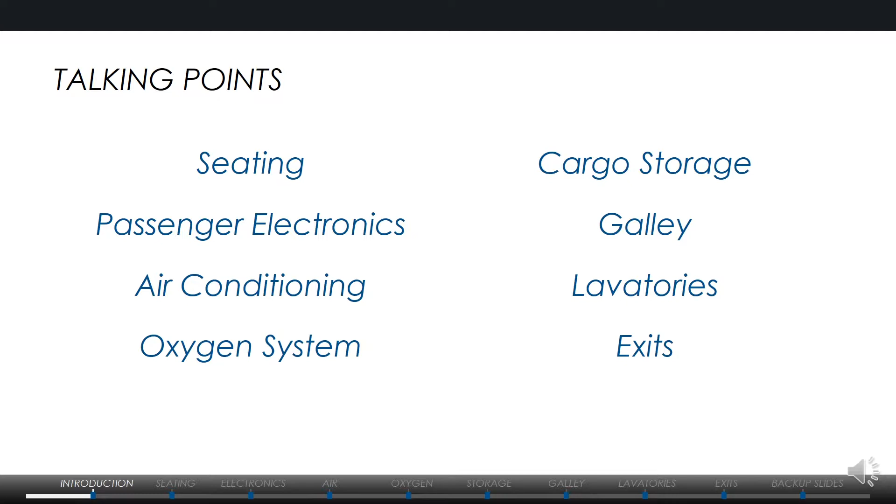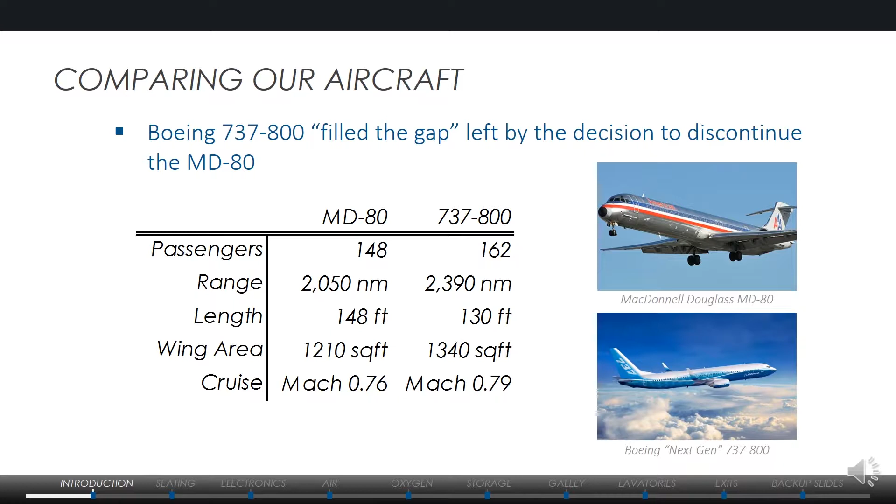We picked the 737-800 because of the similarities in layout, size, and capabilities. Here are the comparisons of specifications for each aircraft.

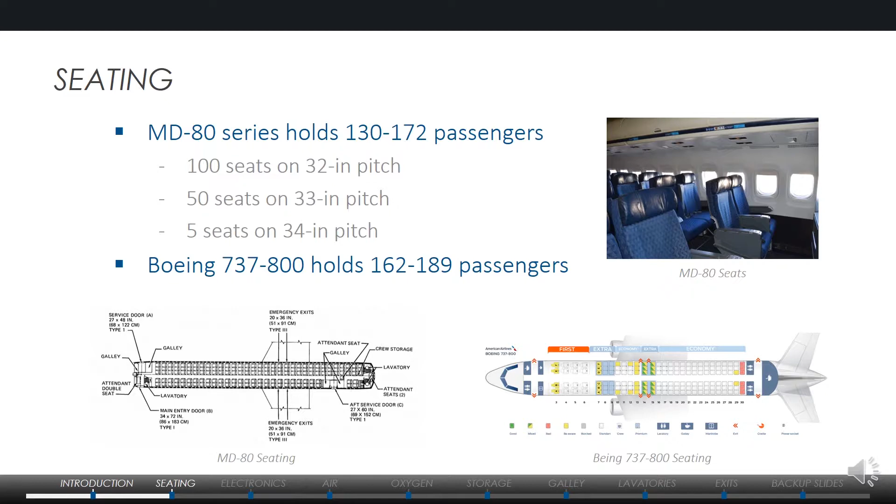Multiple onboard electronic systems are necessary to maintain a pleasurable flight for all passengers. An auxiliary power unit generates electrical energy to subsequently power electronics inside the aircraft. In terms of passenger equipment, this includes cabin lighting, in-seat electronics, and the possibility to charge personal devices via power outlets on newer aircraft, such as the Boeing 737-800.

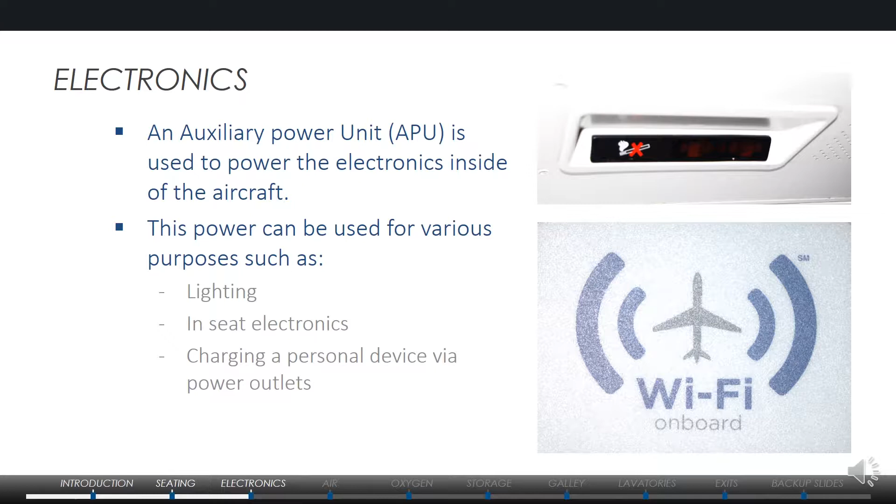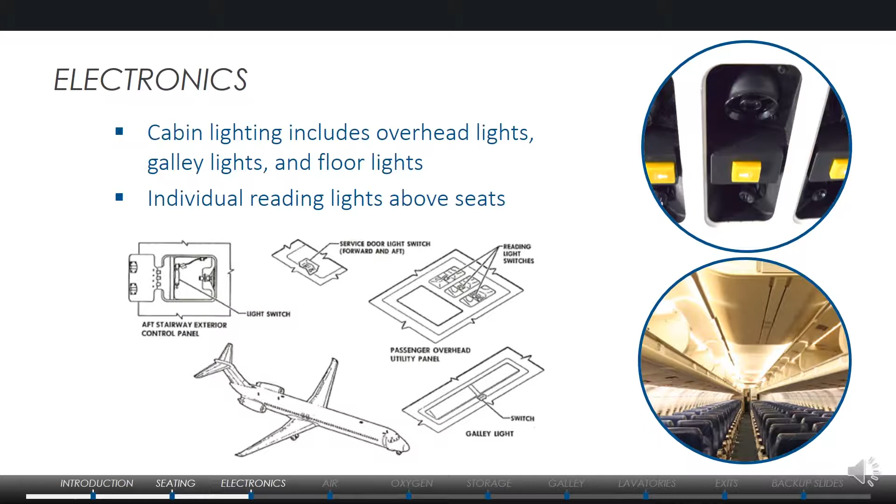Lighting in itself runs on 28 volts DC, as is common for commercial aircraft, and is present throughout the cabin via overhead, galley, and floor lights. Passengers possess additional control of the reading lights placed above their seats.

In order to maintain desirable air properties during flight, it is necessary to control the temperature and pressure of cabin air. 2 air cycle machines deriving bleed air from the engine's 8th stage are primarily responsible for this effect.

At this stage, the air is hot and at a relatively low pressure and is exposed to ambient ram air in order to cool it. A centrifugal compressor then compresses it further, which causes internal temperature to rise up to 660 degrees Fahrenheit.

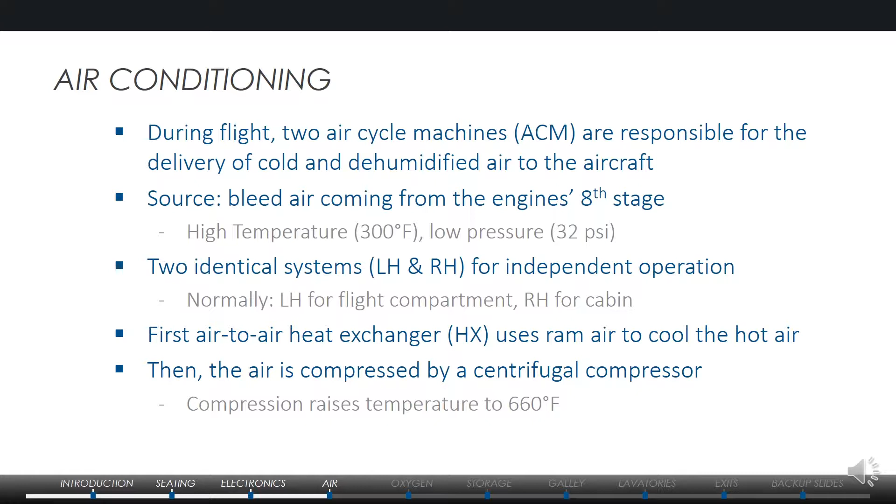Heat transfer with another ram air heat exchanger produces cool, high-density air. At last, the air goes through a turbine. This turbine cools the air by expansion and derives work to power the centrifugal compressor.

After leaving this stage, the air must be dehumidified in order to achieve desirable properties. While this additional water was once discharged overboard, new aircraft such as the 737-800 fleet spray it inside the ram air heat exchanger side in order to increase the efficiency of heat transfer.

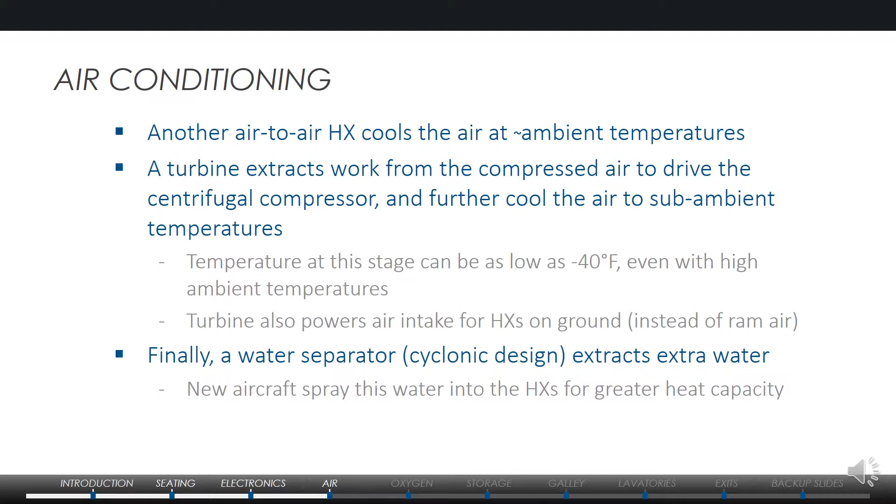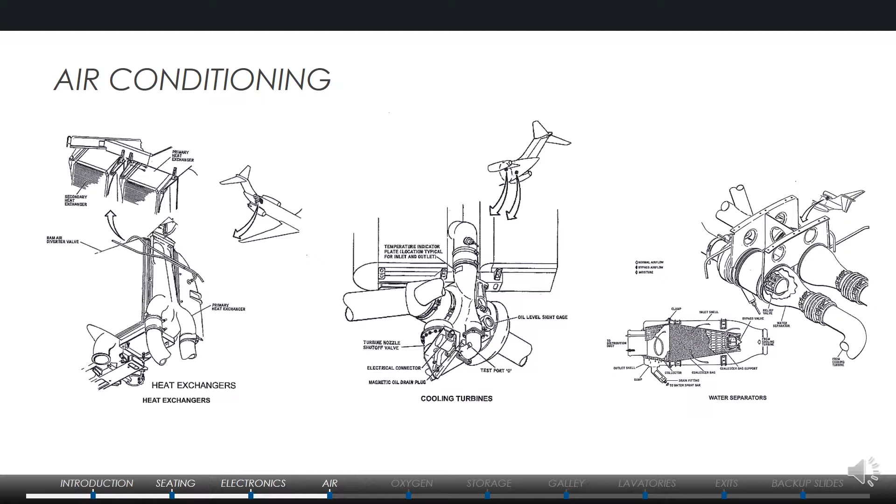After being brought to ideal conditions, the cold air is partially mixed with the cabin air in order to achieve a desirable supply temperature. It is subsequently supplied to the cabin occupants via a supply system ending in a series of eyeball-type sockets above the seats. The cycle is repeated when the air gets warm and is mixed with the cold air coming in from the air cycle machine.

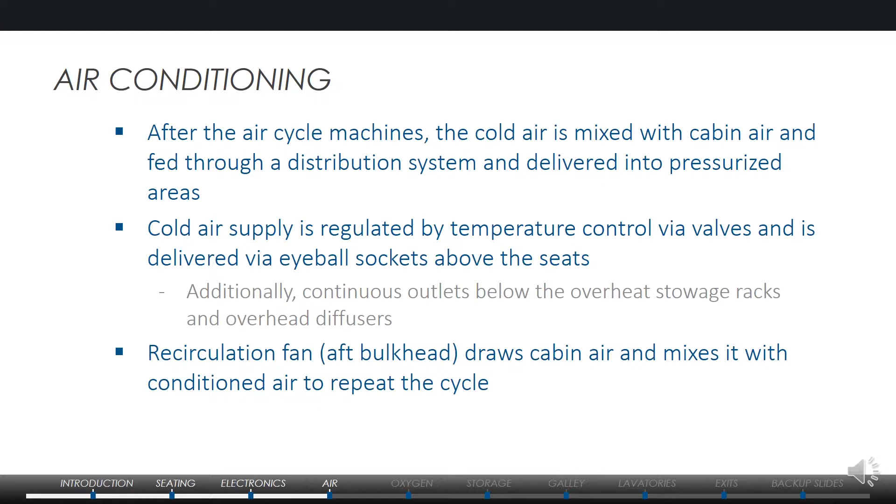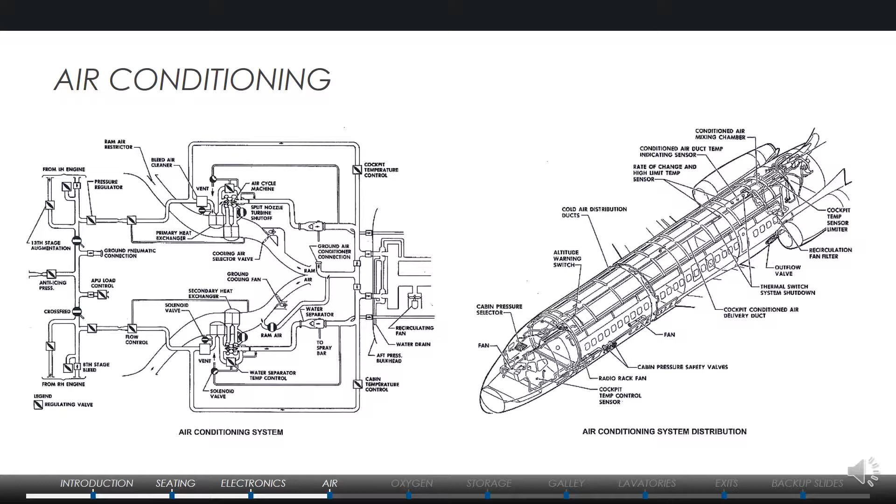The delivery system is here pictured in both schematic and 3D form. A cabin outflow valve regulates the cabin pressure such that it remains at a level suitable to the occupants, typically 10 to 14 psi. A manual valve designed to the same effect is also controllable from the flight deck.

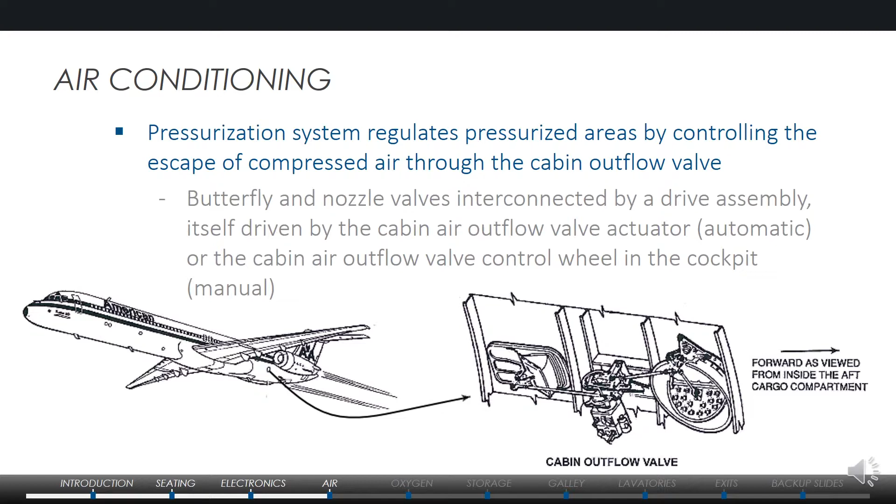In case of cabin depressurization, an oxygen system is responsible for the life support of the flight crew and passengers. The flight crew is serviced by use of a high-pressure oxygen cylinder delivering oxygen to individual masks inside the flight deck.

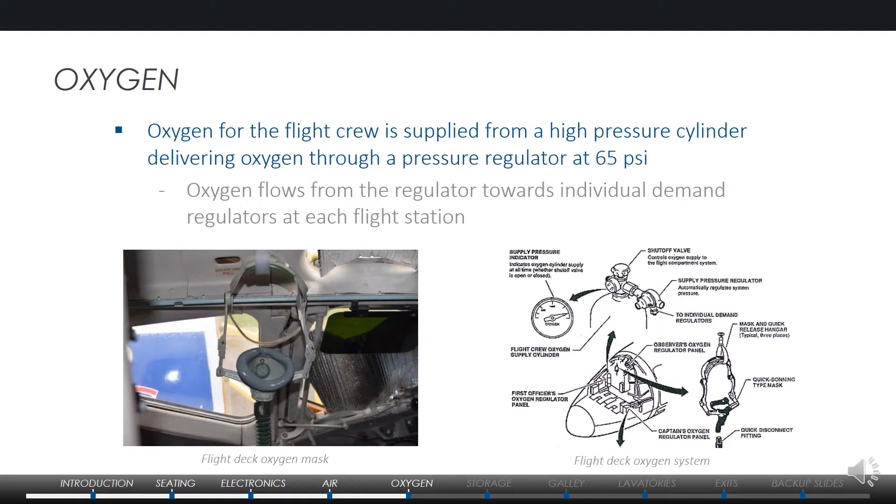In contrast, each seat and lavatory in the cabin is fitted with a dispensing unit which drops from the ceiling and starts generating oxygen once activated. Chlorate is used as an oxygen source via a chemical reaction occurring inside the generator tank.

This reaction is exothermic and therefore necessitates heat insulation in the form of a heat shield in order to protect the passengers from accidental contact with the hot surface. The mask automatically drops from the ceiling once the cabin altitude exceeds 14,000 feet or under 8.6 psi.

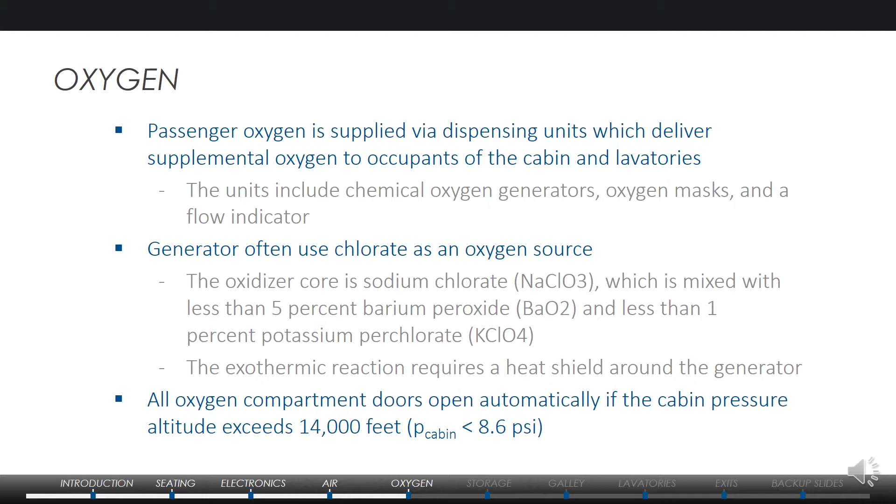The components associated with the passenger oxygen system are here detailed in schematic and picture form.

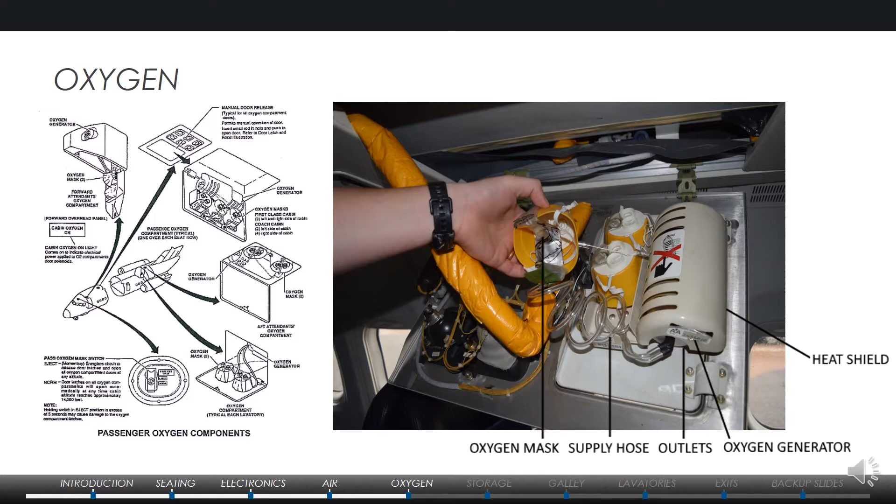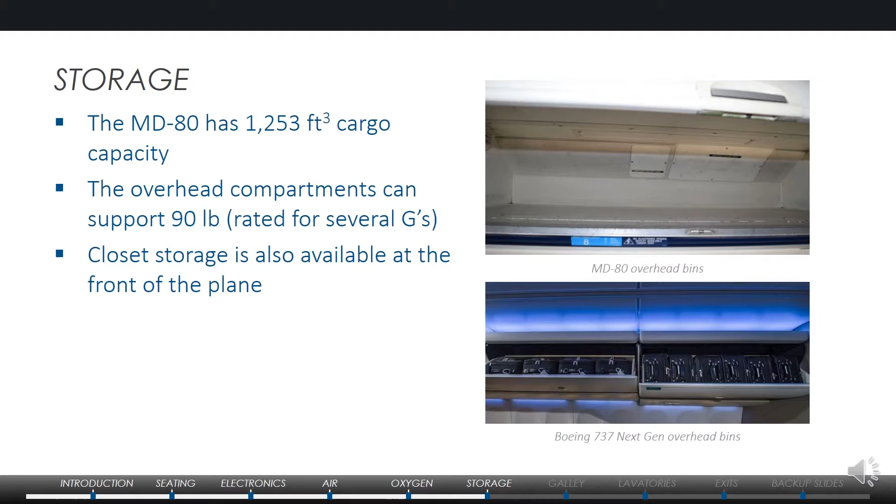The MD-80 has 3 underbody storage compartments. All compartments have the ability to circulate air for pets, while only the forward compartment is heated.

The MD-80 galley is divided into 2 subsections located forward and aft of the occupants. Their purpose is to provide cabin attendants with collation, refreshments, and kitchen utilities in compact form. Each subsection comprises a door in order to allow for external access and restocking.

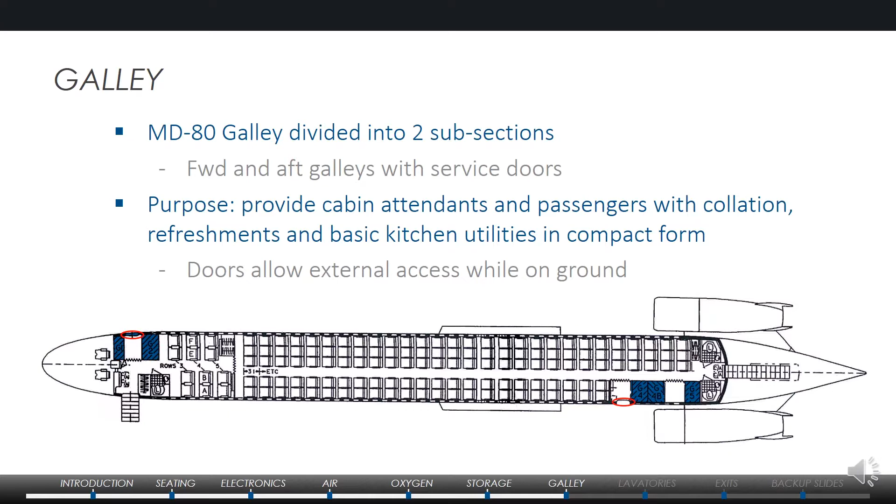The first 2 pictures from left to right display the forward and aft galley section inside the MD-80. The last image shows the Boeing 737-800 galley, which is very similar to former designs.

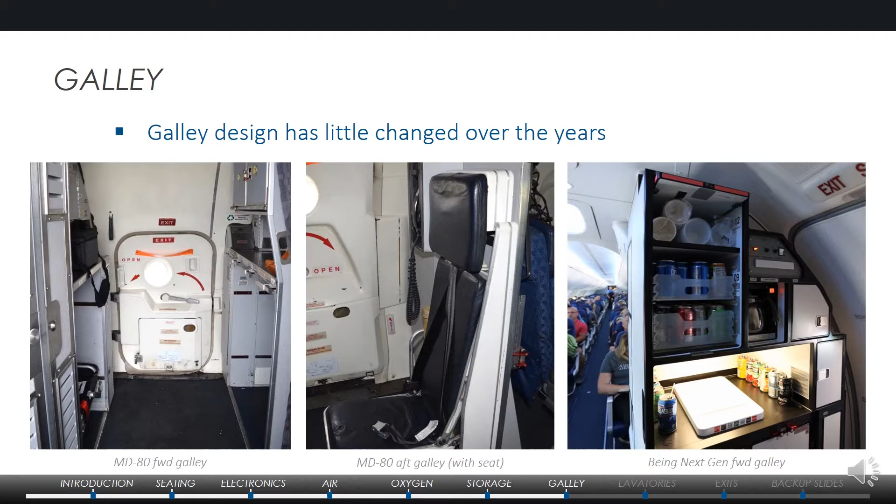There are 3 lavatories on board the MD-80. Toilets with blue water use Anotec Blue SFTY-100, a chemical that disinfects and unclogs the toilet. The Federal Aviation Administration mandates that all airplanes have ashtrays, although smoking on planes is illegal. This is to prevent passengers from putting cigarettes out in the paper waste bin.

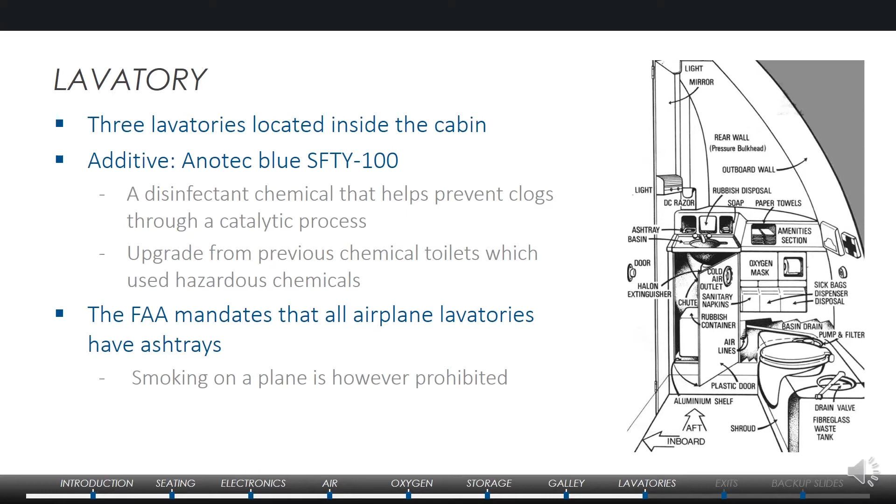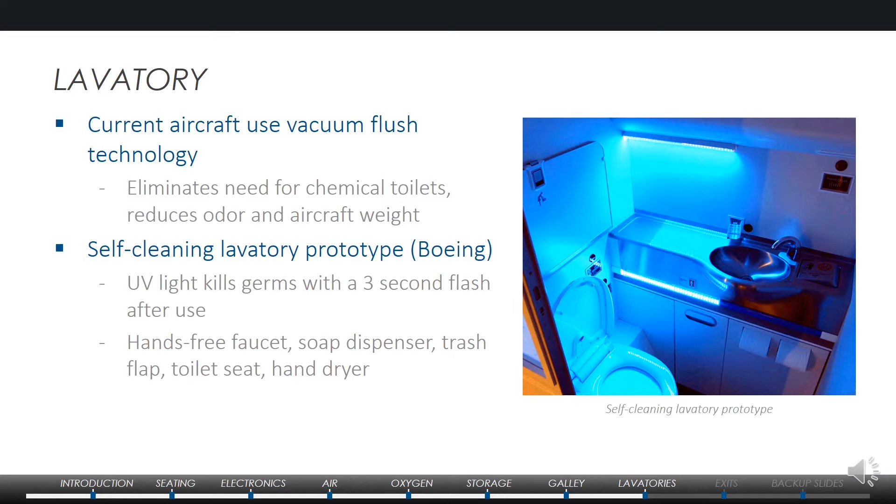Vacuum flush technology now eliminates the need for chemical toilets. Boeing is also working towards self-cleaning lavatories. Outside the plane, service ports are located for potable and lavatory water supply.